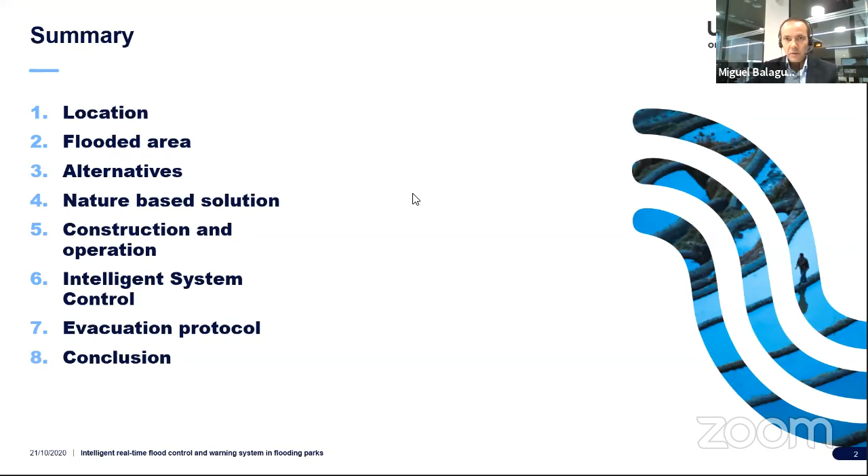I'm going to talk about this project developed in Alicante, located in the east of Spain. This area has extreme weather sometimes, so we have an area that has flood problems. So we needed to create a solution. You can see in maps how this area was flooded for many years, so we decided to take a solution.

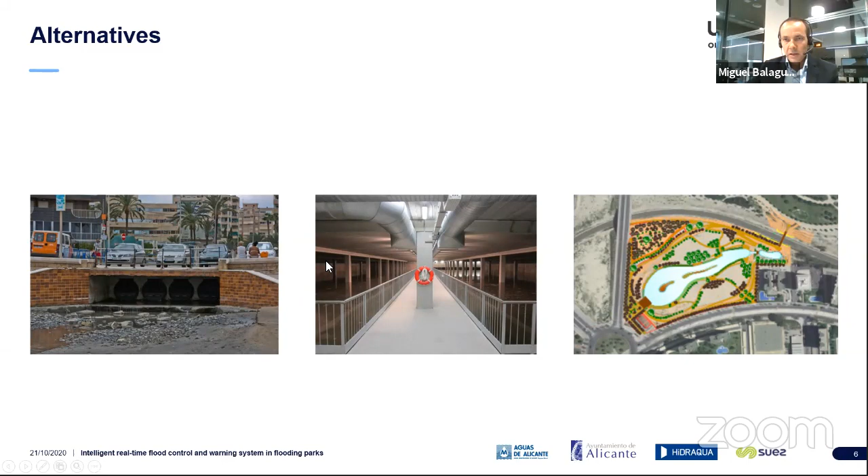These are the alternatives we took into account. The first one was a retention tank, the second was a big collector, and the third was a nature-based solution. We decided to construct the third one.

You can see now in this image, it's a new green area, created with indigenous vegetation and animals in the park. It has a social investment because citizens can enjoy it immediately as a green area.

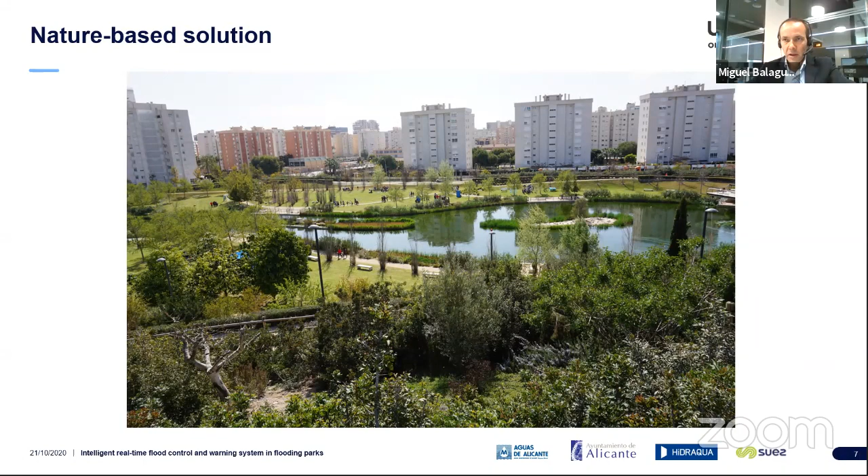As we saw before, this is how it works. It has a big collector connected to the flood park, and we have many other collectors depending on the rain. We have a pump station to the treatment plant, or we can discharge directly to the sea in case the rain was too much.

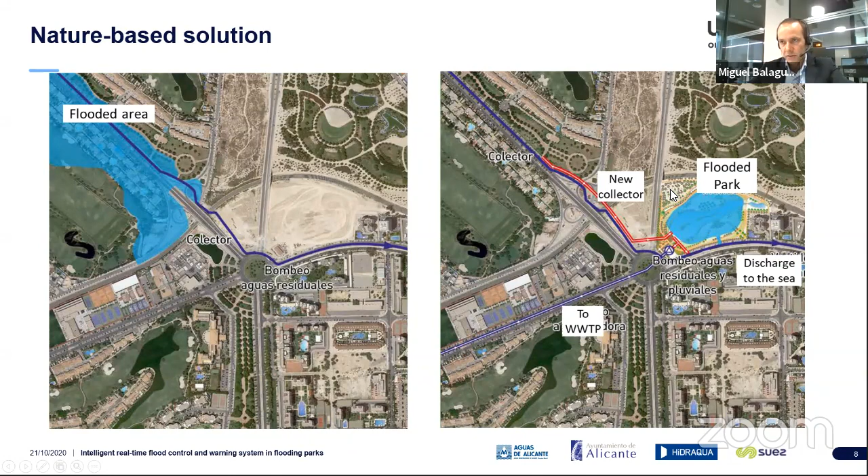In this image we can see how the construction was done. This was a field near the beach, showing different stages of construction. It was a public-private collaboration because Aguas de Alicante, who built this flood park, belongs to the municipality, the Ayuntamiento de Alicante.

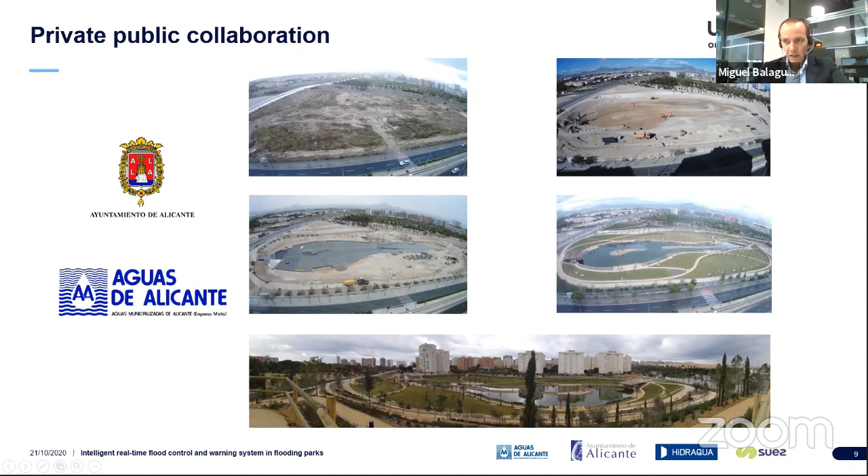How does it work? In the dry season, there is a maintenance level that we fill with recycled water. When it's raining, if the rain is too much, the water will be inside the park, the rainwater.

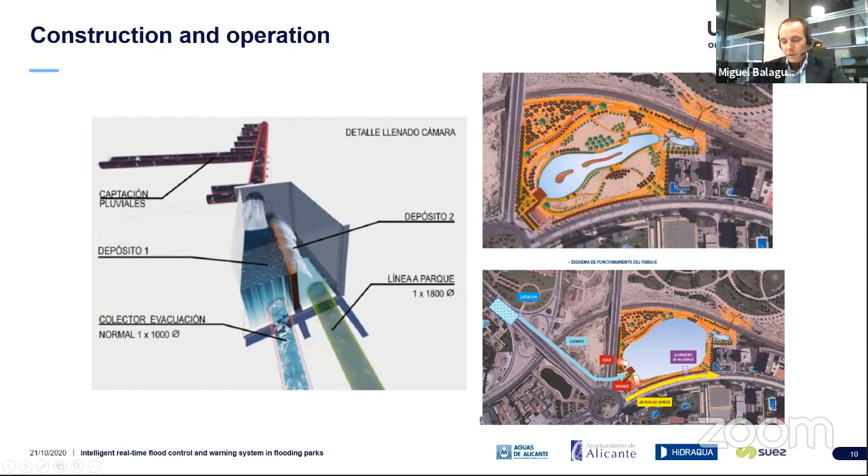Does it work? In this image we can see two cases: August 2019, when it was filling up, and March 2017. We can see the values. The worst case was 2 years ago, when it was filled up to about 49%. This flood park has 45,000 cubic meter capacity, so we only used half of it.

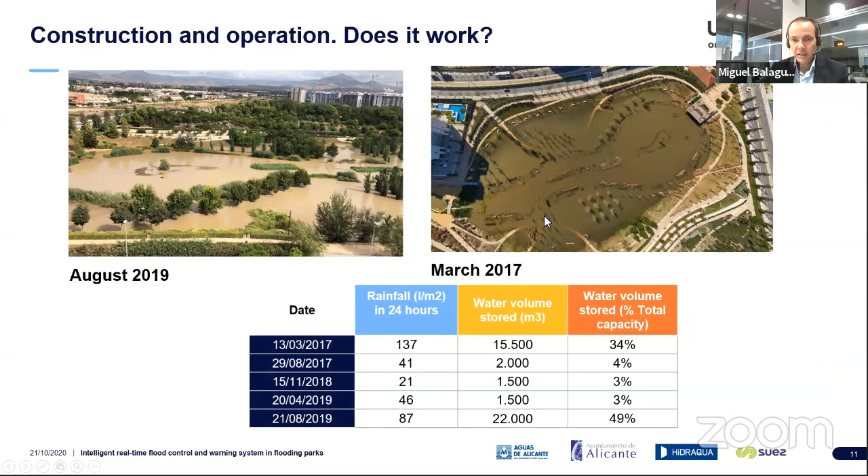The question on the topic is about the evacuation protocol. What happened with the people who were hanging out in the park? Don't worry, the people were evacuated before the park filled up. We designed an intelligent control system, an evacuation protocol.

It has these technologies: a weather forecasting system, 6 water level gauges, 4 rain gauges in the area, security cameras, an electronic display, and acoustic warnings. The system is permanently monitored and controlled 24 hours a day, all year.

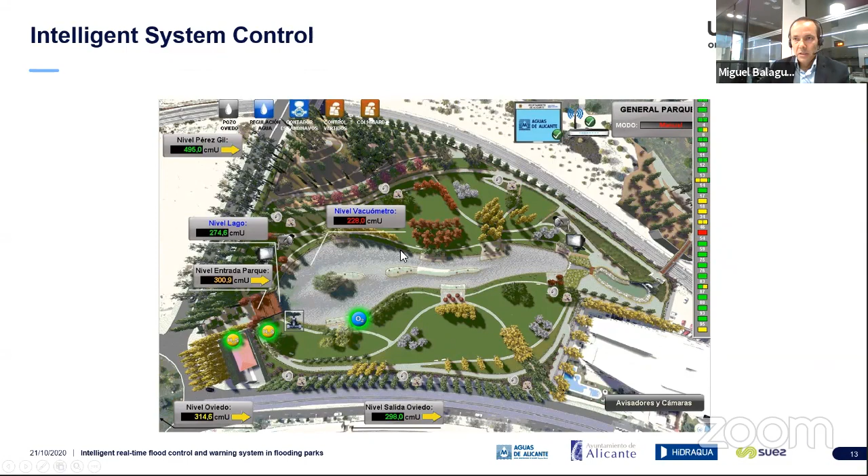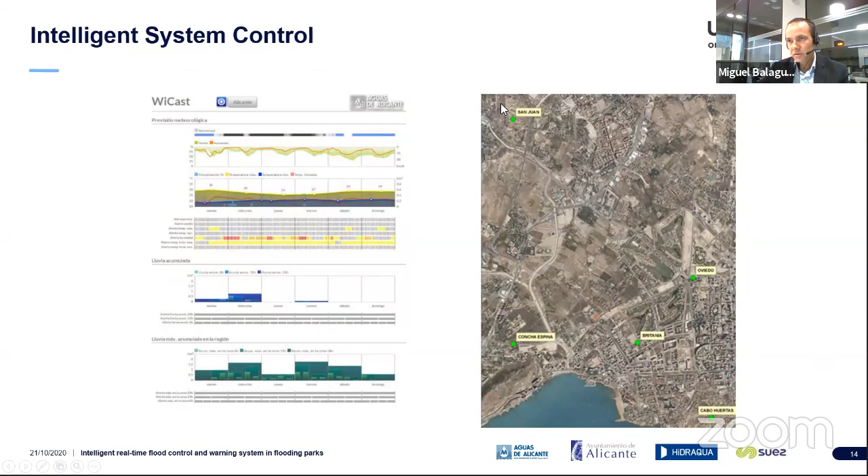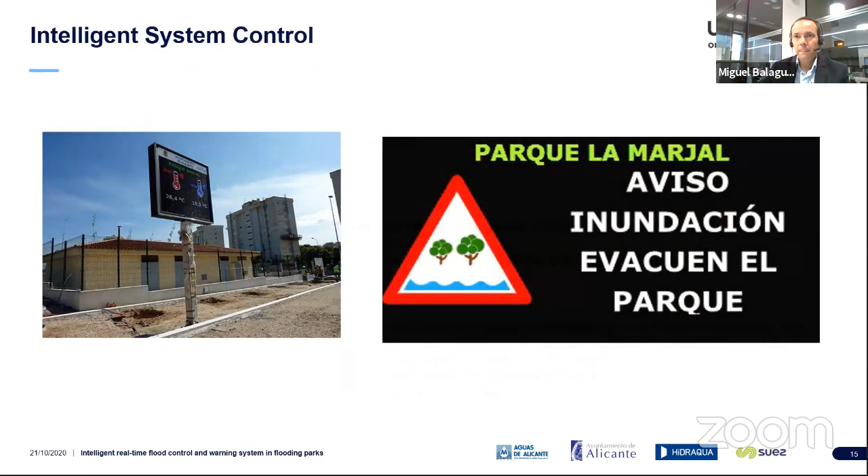This is the big display we have at the entrance of the flooding park. When we notice, we display the evacuation message or the weather status in case it's not raining. And we have defined an evacuation protocol.

When it's not raining, in the dry season, we just do weather forecasting email reporting to the municipality responsible.

When the rain is 1 millimeter per hour, we continue email reporting, but we also show a warning message on the display. The police must visit the park to be prepared in case it's necessary to evacuate, if the park is starting to fill up.

When the rain is too much, we compare the different level gauges and we know when the park is filling up. When the park is filling up, we call the emergency services, local police, municipality, etc., and we start the evacuation protocol.

There is a recorded evacuation message in different languages using the public address system and the display, and the local police will evacuate the park.

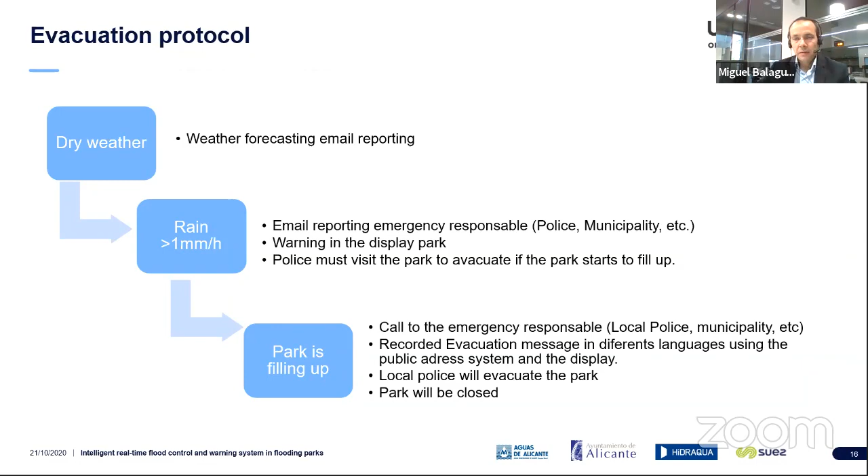The focus of this presentation was the importance of designing this kind of flooding park, always taking into account the evacuation protocol and the monitoring system. This kind of park could be a perfect nature-based solution to avoid floods and polluted discharges into the sea. A new green area is created with indigenous vegetation and animals in the park.

Citizens can enjoy it immediately as a green area. It's also a reuse park, because a large part of the excavation material from the ponds was reused, minimizing the environmental impact by reusing construction waste. The park uses reclaimed water for irrigation and filling the ponds.

But the question is that this kind of flooding park could be very dangerous, so it should be designed to fill very, very slowly, to allow enough time to evacuate people. The warning system and the evacuation protocol of the flooding park must be taken into account in the design and construction phase to avoid risk.

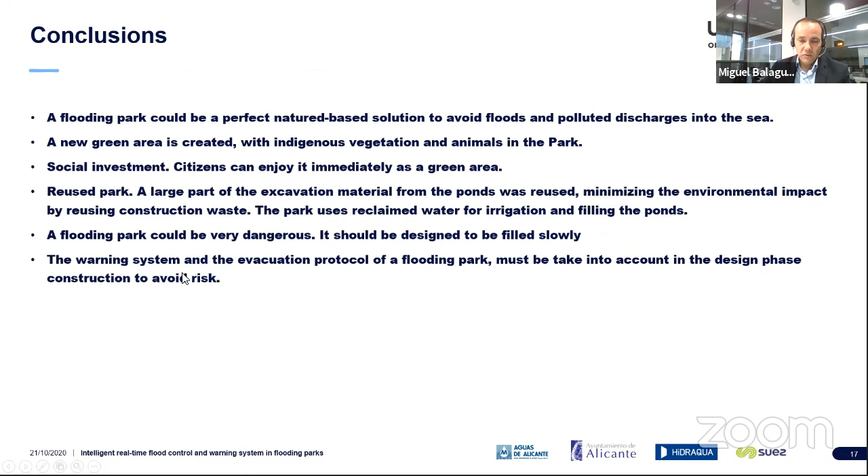So this is our presentation. Thank you very much.

Thank you, Miguel. Thank you so much. I think your presentation was a great example of a practical study, something that has even been realized. It was very interesting for me to see the project go from the master plan to the realization, and I'm sure everyone has enjoyed it.

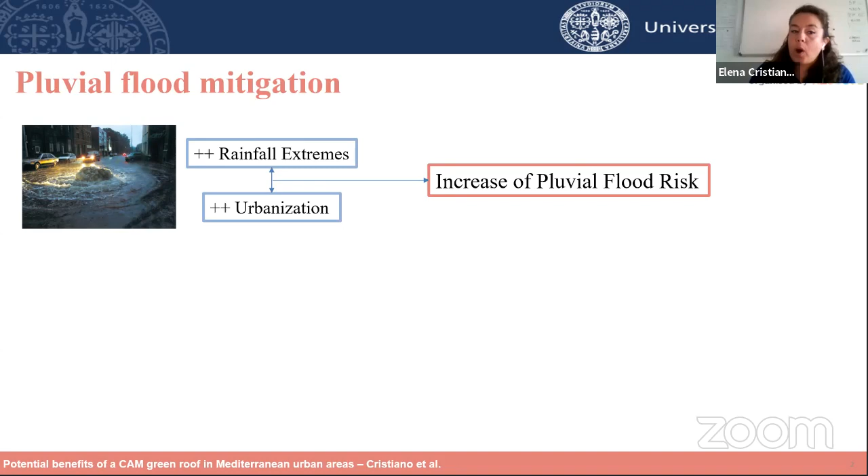In order to deal with this problem, many blue and green solutions have been developed. For example, we have permeable pavements, water plazas, harvesting systems, or green roofs. In our study, we decided to focus mainly on green roofs.

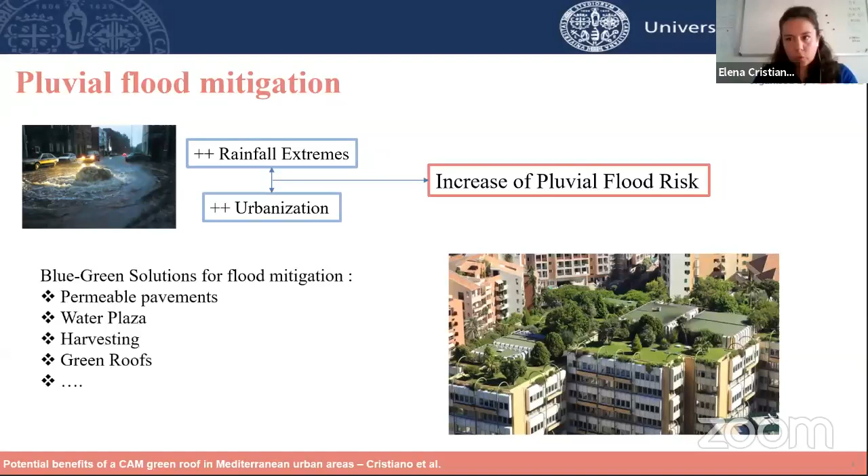Why? Because these offer multiple benefits. They can contribute to mitigating runoff generation, but also have other benefits: contributing to thermal insulation of the building, decreasing the temperature of the environment and contributing to decreasing the urban heat island, and attracting many species of insects, increasing the biodiversity of the city depending on the type of vegetation installed.

Moreover, it adds an aesthetic value to the city, which is nice, and many studies have shown that it can help human well-being, increasing concentration and improving the quality of life of people.

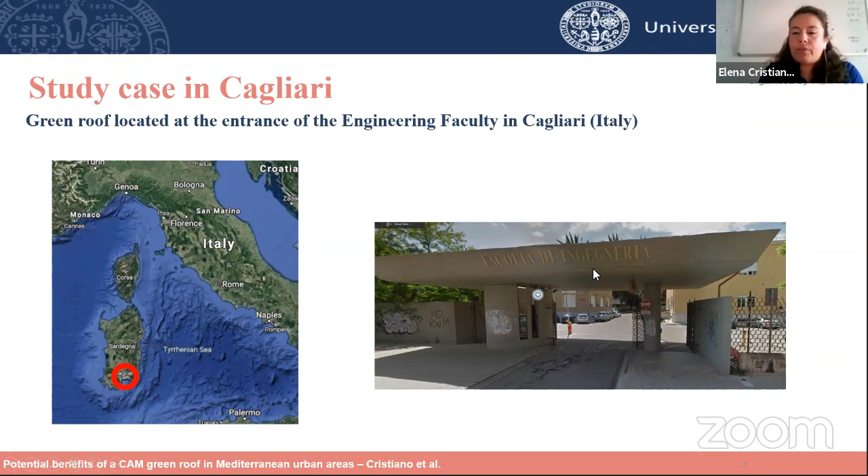Another reason why we focus mainly on green roofs is that at the University of Cagliari, we have a special green roof located at the entrance of the engineering faculty. As you can see from this picture, above the entrance we have a green roof, which is particular because it has been there since the 80s and has spontaneous vegetation. Probably in the 80s, when it was constructed, there was another type of vegetation which died because of the hot summers and the really low, actually absent, maintenance. On top of it, some natural vegetation grew.

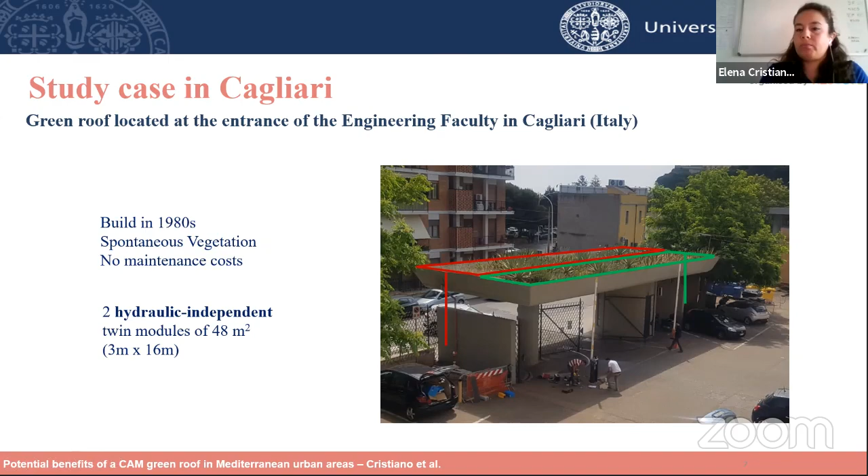What we know for sure is that no one took care of this vegetation until now, when we decided to install instruments to measure the retention capacity of this tool. As we can observe, this tool is made of two hydraulically independent modules: the red one, which drains on the left side, and the green one, which drains on the right side. We decided to measure the retention capacity of these two independent modules.

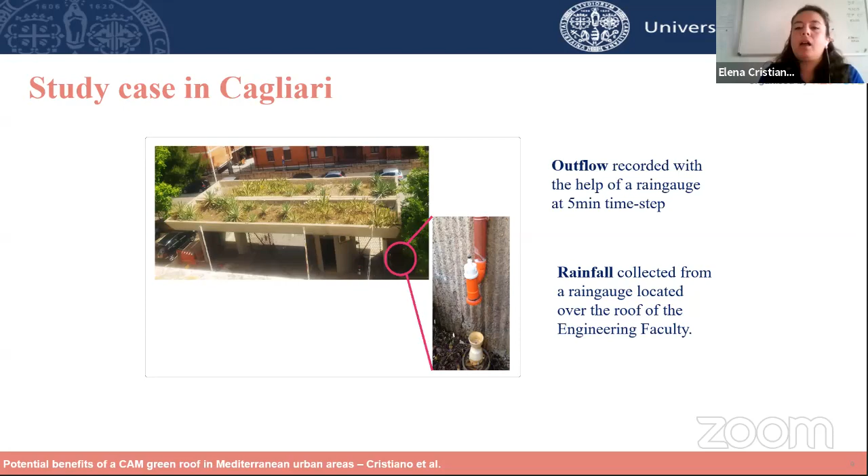So as said, the two tanks drain on the two sides, and we located some tools, some rain gauges, to measure the outflow from these tanks. Moreover, there are some rain gauges located close to the faculty, so we can have a measure of the rainfall and of the corresponding outflow from the green roof.

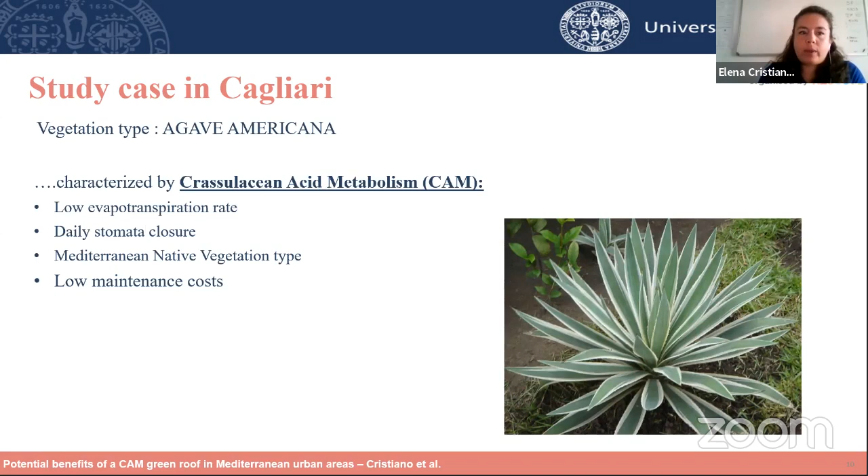About the vegetation, as I was saying, this is typical vegetation from the Mediterranean area. It's an Agave Americana, characterized by a crassulacean acid metabolism, which means this type of vegetation has a low evapotranspiration rate with a daily stomatal closure. As I said, it has no maintenance cost, doesn't require any artificial irrigation, and is capable of surviving during very extreme hot summers.

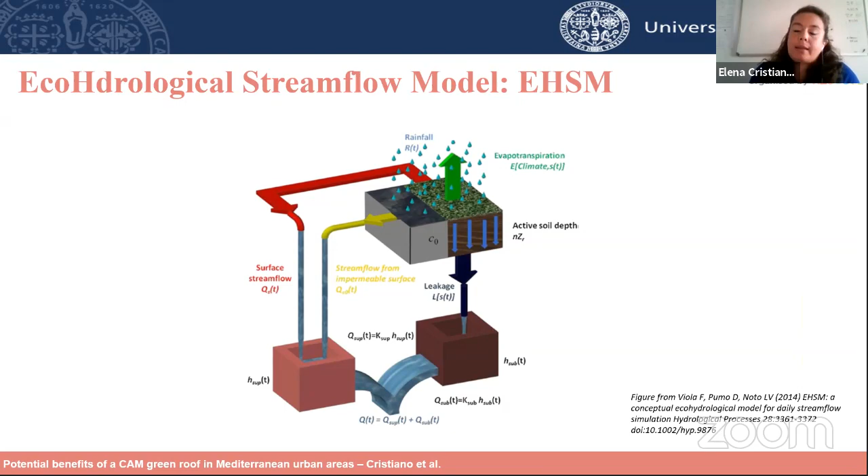We represented the hydrological behavior of the green roof with a conceptual model. Here you can see a schematic representation of the model, developed by Professor Viola, which we adapted to our study case. We calibrated the model over an observation time of one year, during 2019. What we observed was that the model was quite capable of estimating the peak of the outflow and its timing. So both in terms of timing and intensity, the model represents well the behavior of our green roof, on both the right and left side.

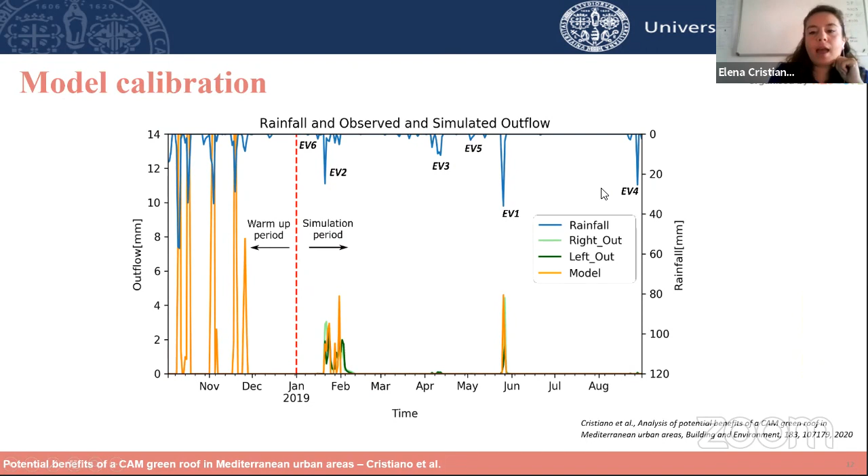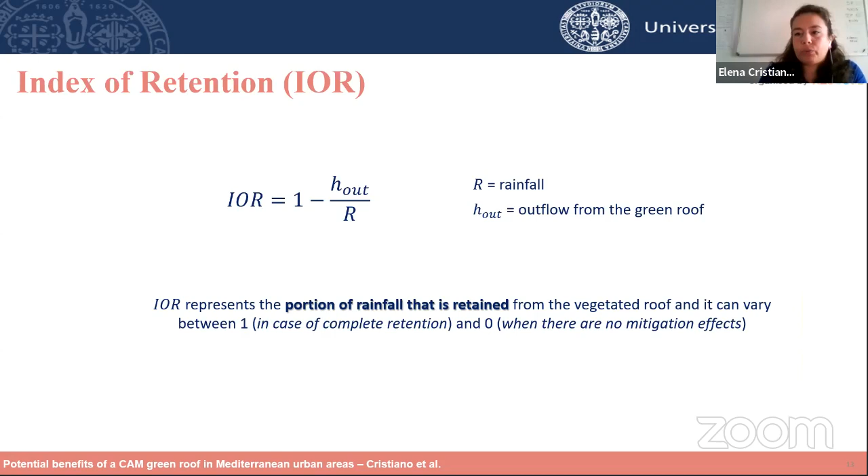We investigated the index of retention for the 6 rainfall events mentioned before, and tried to relate this index with some event characteristics. In particular, we focused on the antecedent dry period, investigating how many days before the rainfall event were dry with no rainfall, the duration of the rainfall event, and its intensity. We noticed there is an interesting relation between the index of retention and the duration of the event, as we were expecting: long rainfall events led to smaller indexes of retention.

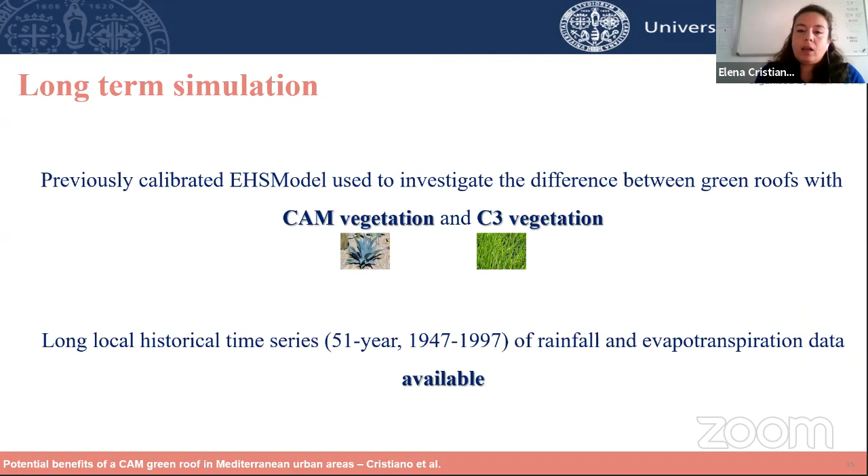Once we calibrated our model, we decided to compare a green roof with CAM vegetation to a potential, hypothetical green roof with C3 vegetation, a more common vegetation usually installed on green roofs. With the calibrated model, we represented a really long historical time series from 1947 to 1997, and compared the green roof with these two types of vegetation.

There is one note that C3 vegetation applied in Mediterranean areas requires some irrigation. So if we install a C3 vegetation on a green roof, which is generally grass or small plants, they need irrigation during summer to survive. So during our simulation, we hypothesized some irrigation for the C3 vegetation, while for the CAM vegetation, we decided not to apply any type of irrigation.

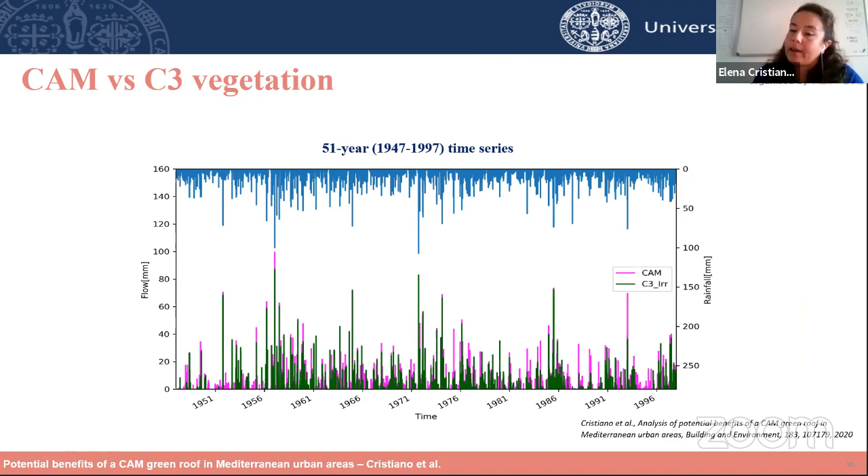This is the long time series simulation, and as you can see, the outflow from the CAM vegetation is higher, but it's actually quite similar to the C3 vegetation.

We investigated the index of retention for these two conditions, limiting it to intense rainfall events and extreme rainfall events. So we investigated all the events above the 75th quantile rainfall and all the events above the 95th quantile rainfall in order to represent these two conditions: intense rainfall events and extreme rainfall events.

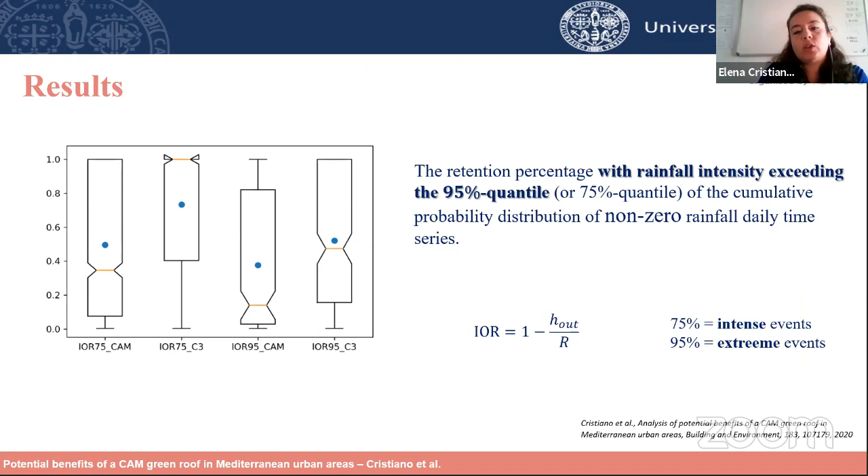What we observe is that indeed for both conditions, both green roofs perform really well. Of course, C3 vegetation is better, but only slightly better, so we wouldn't expect the CAM vegetation to perform worse.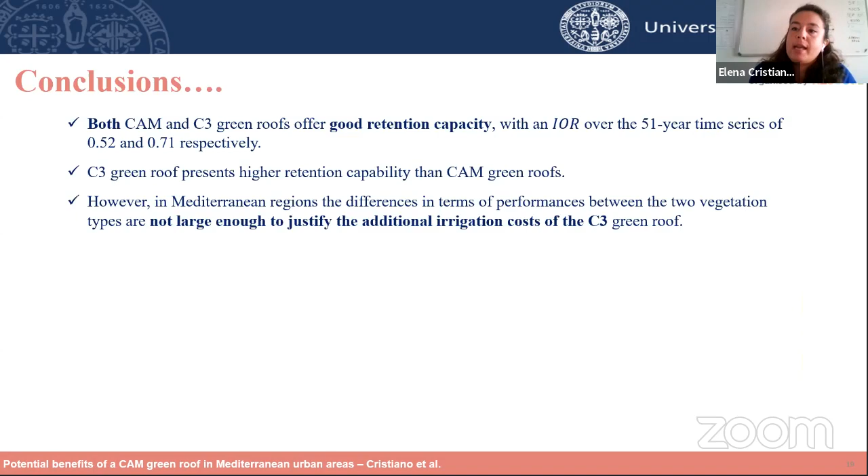To conclude, as I said, we observed that both green roofs have a good retention capacity. And what is important to notice here is that sedum vegetation, which is usually not considered for green roofs in Mediterranean areas, can perform really well. With the fact that it has no maintenance cost and doesn't need additional irrigation, it is actually to be considered for the installation of green roofs.

Of course, this is a synthetic study, so there is a need to investigate other types of vegetation. It could be interesting to investigate some multi-layer green roofs which combine the green roof structure with a rainwater harvesting system. And with that, I would like to thank you for the attention.

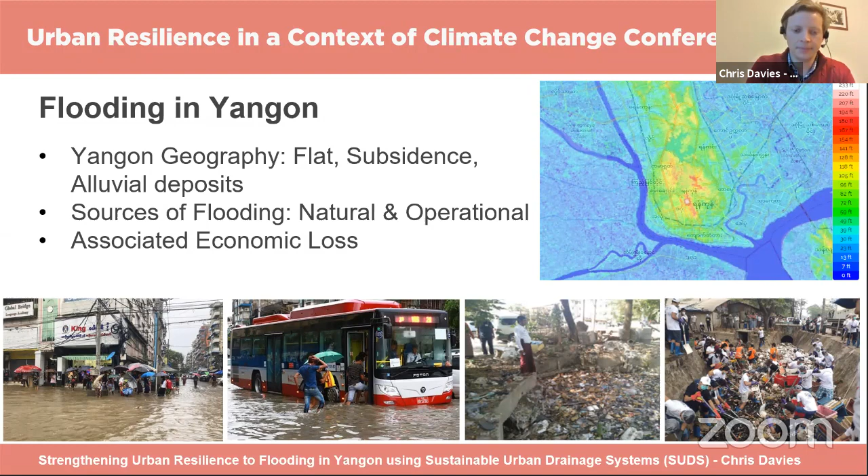As with many cities in the Southeast Asia region, Yangon has experienced rapid urbanization in the past 20 years. To bring some focus to the project, our team looked into three case study areas: formal developments, which is commercial and residential; industrial zones, typically factories and warehouses; and informal development, which is low-cost residential and informal market areas.

Within these case study areas, we talked with a range of stakeholders from public, developers and local authorities to understand perceptions of flooding hotspots and the causes of flooding.

To complement this information from the interviews, we also built hydraulic models using EPA's stormwater management model. This used data from some existing models of Yangon drainage, as well as a series of field surveys from our team.

We were able to target key flooding issues in our case study areas and present these to the authorities. So a common issue, by no means unique to Yangon,

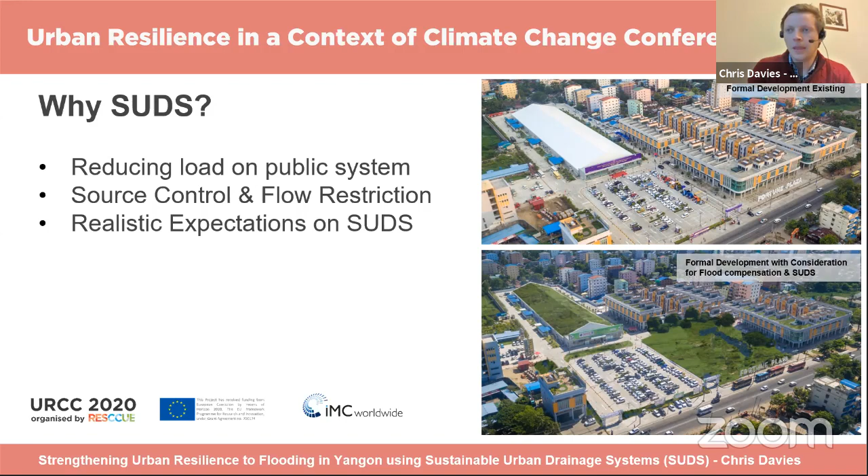We brought these findings together in a series of policy notes, including technical SUDS guidance for developers and policies on the planning process, working closely with local authorities.

These policies were then applied in case study areas to demonstrate effectiveness and understand viability. Ultimately, we're trying to create an enabling environment where landowners and developers have an incentive to adopt SUDS as a core part of the development.

We also developed flood zone maps across Yangon to help authorities target critical development. Many of you will be familiar with flood zone maps, but it was all quite new to the authorities in Yangon.

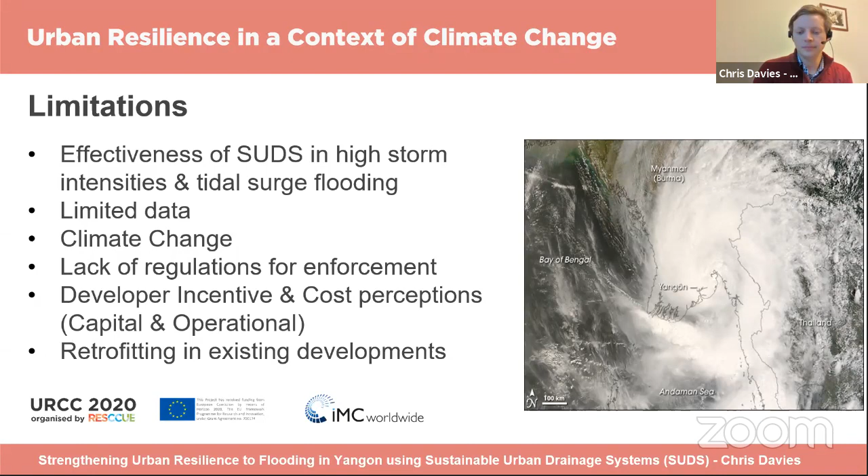So as an overview, I've talked about the range of flooding sources affecting Yangon and our case study approach, how we use this to assess specific issues and solutions. I've also touched on our policy recommendations for mapping and technical guidance, and also the planning process.

I would like to emphasize at this point that I only see SUDS as part of the solution, largely due to the high storm intensities, also susceptibility to flooding from tidal surges.

There are lots of heavy infrastructure projects under preparation in Yangon, and I'm very supportive of these.

So next steps for us are to continue to develop policies with the authorities, and also look at a new project to identify and improve key drainage assets. Thank you for your time.

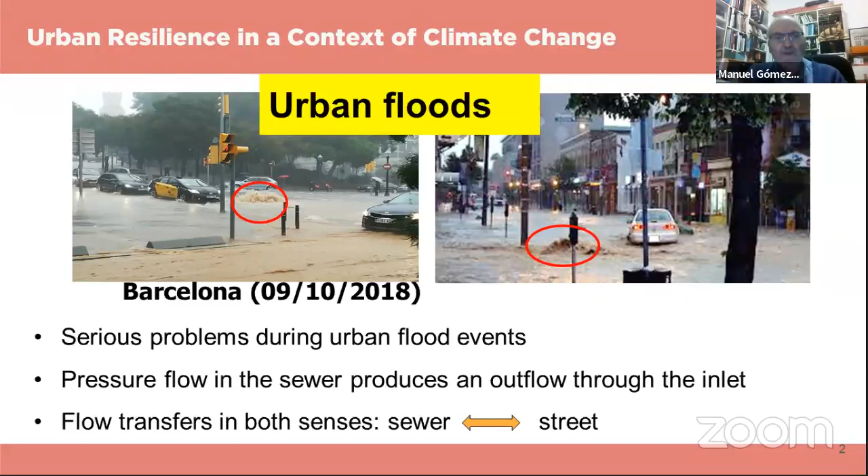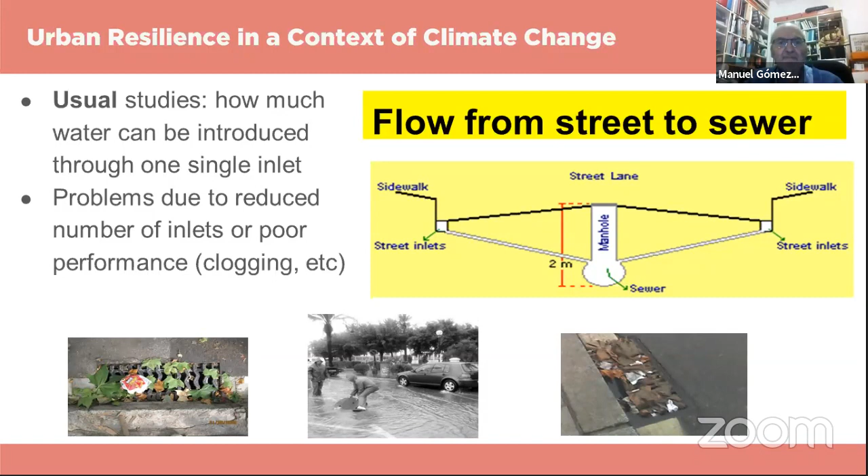What are the main problems we can have in the operation? As I said, most previous studies focused on how much water can be introduced into a single inlet. But there are several problems in some cases. For instance, we have observed local floods in our cities due to the lack of enough inlets in the district, and sometimes even poor performance due to clogging. Many times you can see in pictures that the inlet is completely covered by leaves or papers and so on.

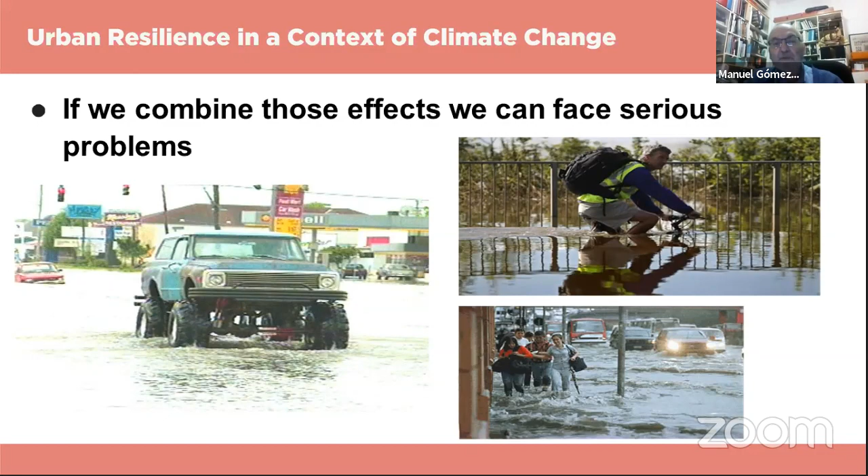If we combine all these effects, we can face serious problems for vehicles—no problem if you can acquire a monster truck like this one—problems for bikers, or even problems for pedestrians if you're not careful, like these ladies in Brazil.

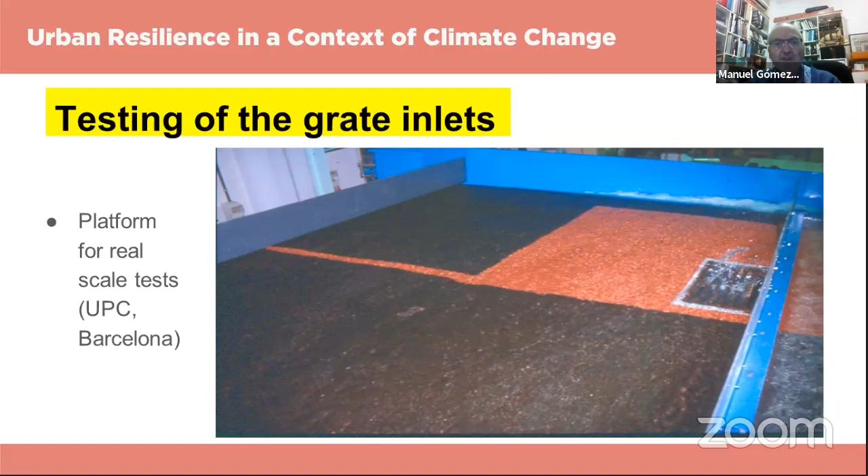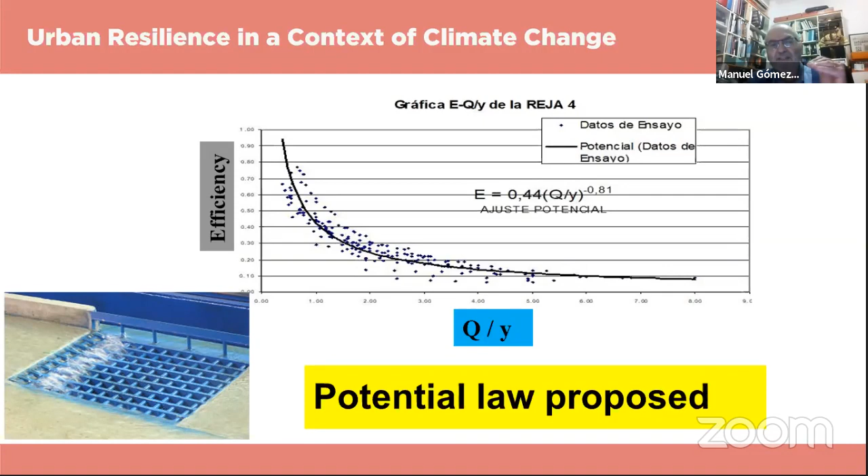The traditional studies, as I said before, were basically about the flow from the surface to the sewer. This is a picture of the platform we have in the laboratory at the Technical University of Catalonia, School of Civil Engineering, where we have tested the most usual inlets in the city of Barcelona. We have arrived at describing the efficiency of the inlet based on the characteristics of the flow along the street—this ratio between the flow and the water level, this potential law can be used to characterize the hydraulics in the sense from street to sewer.

But especially in recent years, drainage analysis in many cities has been done using this dual drainage approach—a joint analysis of what happens in the sewer and what happens with the surface flow in urban areas. Usually they use 1D modeling for the sewer system, and most of the time a 2D approach for the street flow. So the connection between these two levels is basically done through the inlets, the manholes, and so on, allowing flow transfer in both directions, street to sewer and sewer to street.

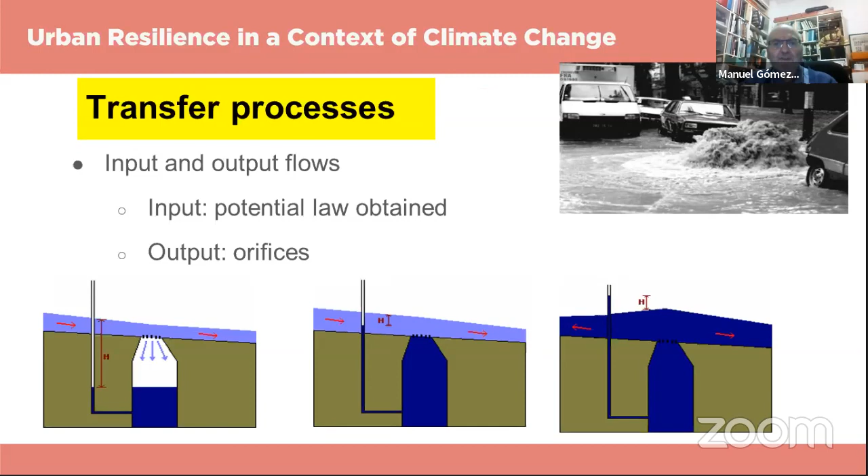The transfer process can be seen here. At the beginning, on the left, is when the sewer system is not fully pressurized, so maybe the flow goes from the street to the sewer. But as the flow in the sewer increases, we can arrive at a situation, for instance on the right, where some flow exits the sewer and reaches the surface level, increasing and producing more problems with local floods. So the specific objective of this research was to express the hydraulics of the exit flow from the sewer with a typical expression, like an orifice, and to describe the discharge coefficient for these grates in cases of pressurized flow.

Unfortunately, there are very few references of work on this, especially field tests or laboratory tests. For instance, in several commercial codes, those discharge coefficients are suggested at a typical value of 0.6.

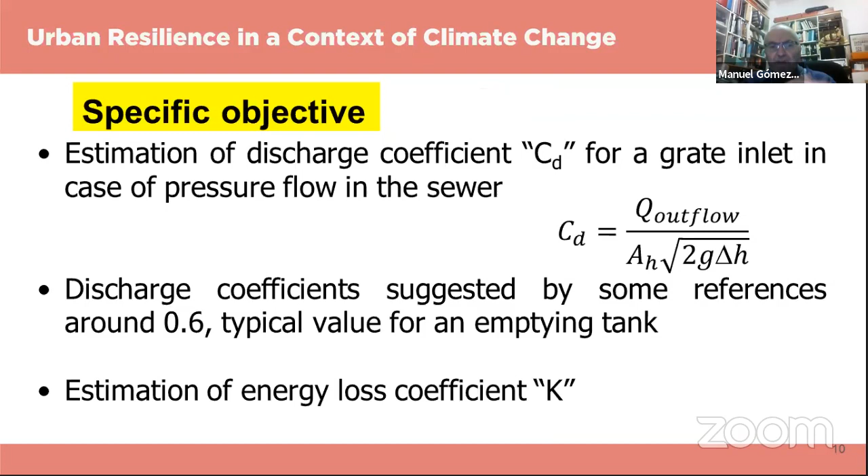This is a reference, for instance, for an emptying tank. It would be possible also to analyze the energy loss coefficient, but that's another history and not a question for this presentation. So we modified our experimental setup.

The idea is how to produce outflows from the sewer network to the surface, in this case to our platform. You see in the upper part of this picture the inlet and how the flow goes through this pipe, producing the outlet, the outflow.

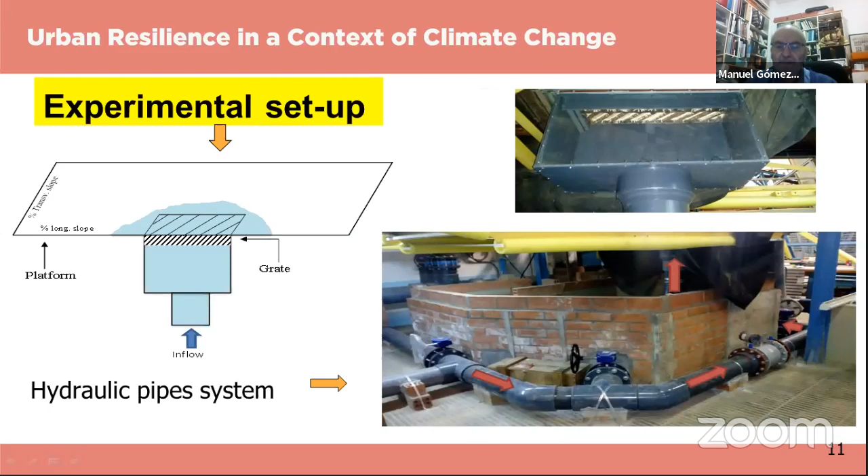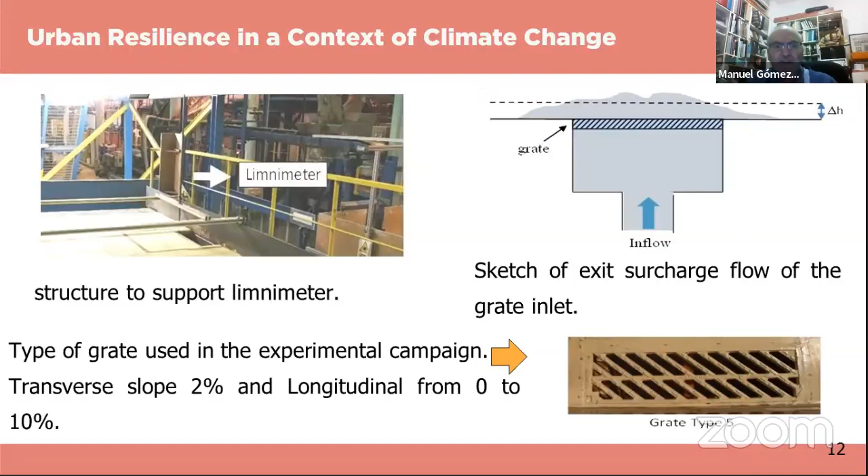Again, this is the type of grate we tested. We measured the water elevation over the grate by hand using a limnimeter. We decided to use around more than 20 measurement points.

So for the estimation of this discharge coefficient, what do we have? The outflow is imposed by ourselves in the lab. The CD is what we're looking for, the discharge coefficient, including all the characteristics of the energy losses, the shape of the grate, and so on. Then G, the gravity acceleration. The AH is the area of holes of the grate, something not provided by the manufacturer.

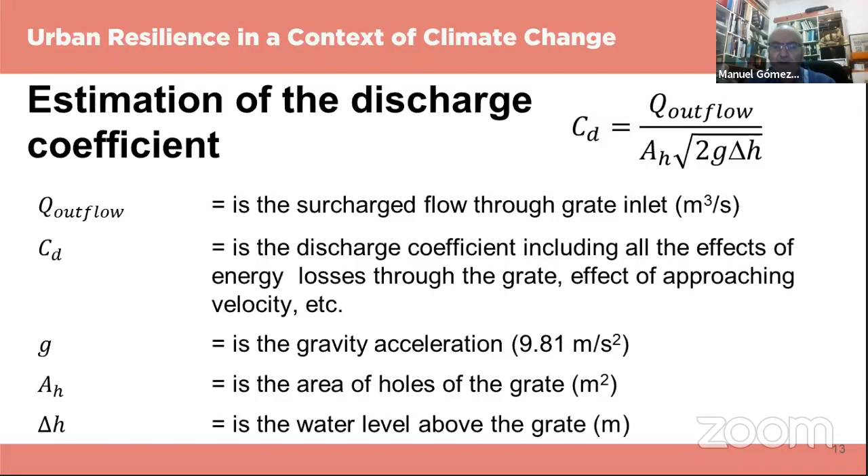This delta H could be the water level above the grate. For sure, the water level is not constant all over the grate, so that's why I decided to measure at around 20 points just to get an average.

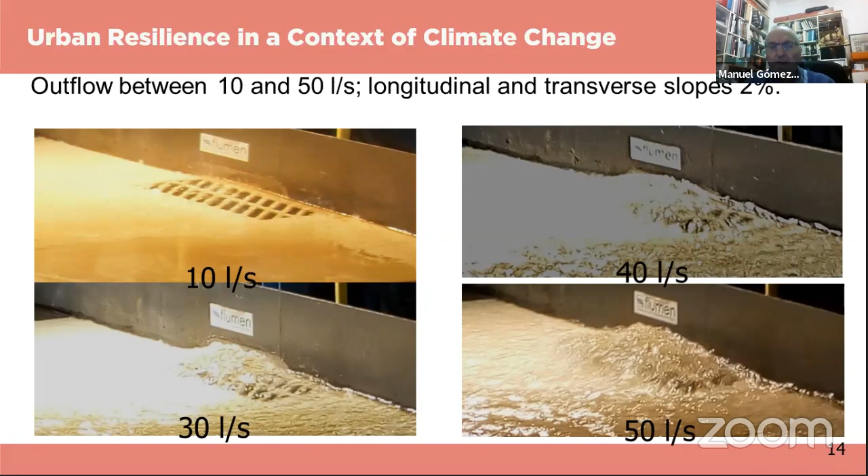During the outflow, we had to measure the water elevation over the grate at 20 different points for each test case, to consider an average value of the over-water level above the grate. We can see that it's not constant, moreover it's oscillating, so the measurement process was a nightmare, but it was finally accomplished.

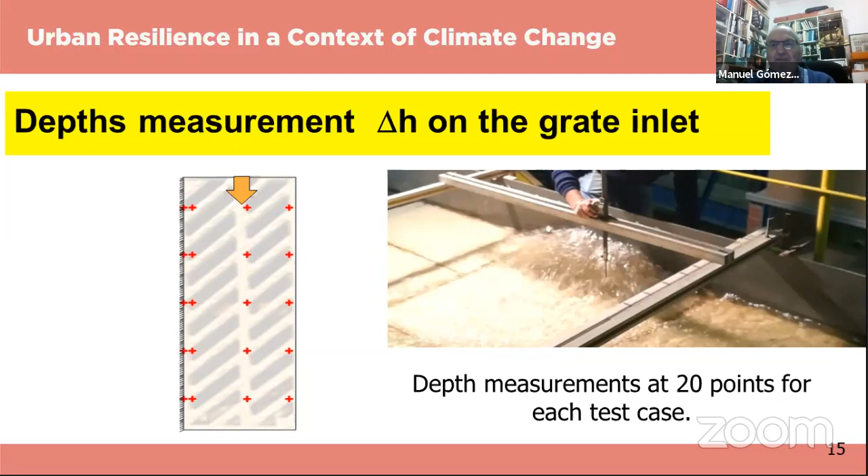So what do we get? That's interesting for the results here. What about the discharge coefficients? What we saw is that for the flow tested between 10 to 50 liters per second of outflow from the sewer, the discharge coefficient obtained varies between 0.15 and something less than 0.4. So it's not close to 0.6 suggested by most commercial codes. Moreover, what we saw is that the discharge coefficient increases with the outflow - it's not constant. The value could multiply by 2 and sometimes close to 3.

What is the influence, for instance, of the longitudinal slope? We saw that this longitudinal slope has almost no influence. We can consider that the flow value is the dominant reference for the hydraulics of this process. So slight variation, but we had no problem accepting that for different longitudinal slopes for one flow, the discharge coefficient could be completely constant with no difference.

All the tests were made with the same value of transverse slope, 2%, which is the usual value recommended in most local guidelines all over the world.

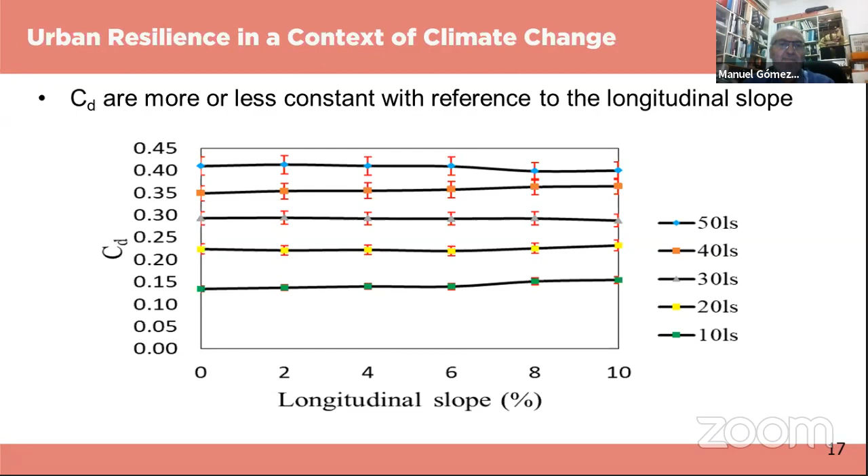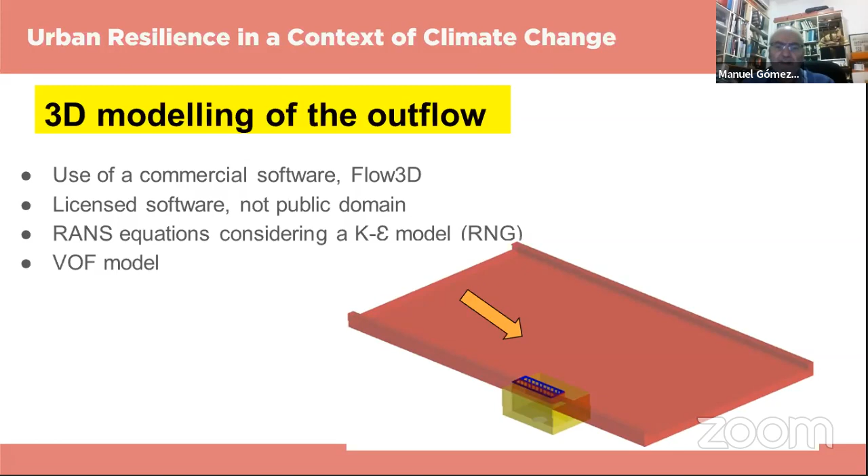In parallel with this laboratory test, we did some numerical analysis with a 3D computer code. We used a commercial software called Flow 3D - it's a licensed software, not public domain - including the Reynolds average Navier-Stokes equations with the k-epsilon model, the renormalization group, and a volume of fluid model to define the free surface in the analysis.

So we compared the water levels that we found in the lab with the water levels we got from the numerical analysis, and they were quite similar, surprisingly. I say surprisingly because when you try to compare observations in the lab or field with numerical analysis, sometimes there are distortions.

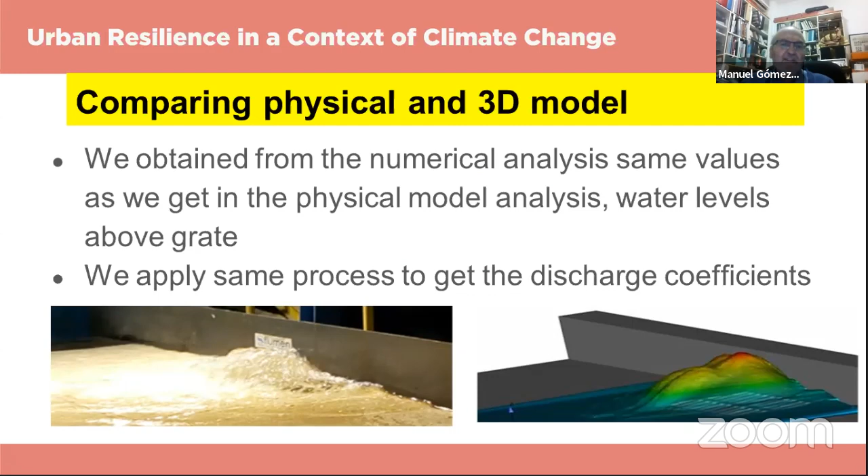But in this case, we compared the discharge coefficients found in the laboratory test and the numerical test, and the values were quite similar. The numerical procedure overestimates very slightly the discharge coefficient, but what is interesting is that in all cases, those values are below the suggested value by some codes of practice.

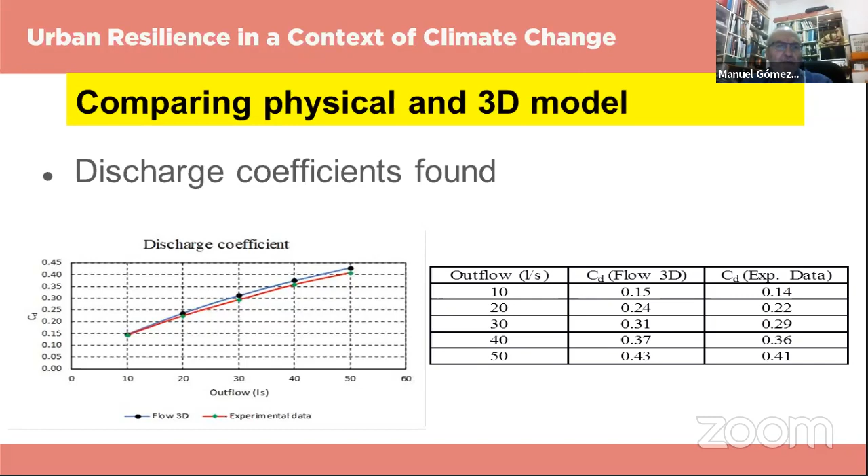To finish, the flow transfer between the streets and the sewer, in both directions, especially for the dual drainage concept, is a key element in the analysis of surface flow at the streets. The usual application of some discharge coefficient must be verified properly, because unfortunately there was little or no reference about usual values. The typical value suggested in many commercial software is far from the observed values we found in the lab, and other authors found similar values in other studies.

One side conclusion is that the process can be done better in the labs, for sure - that will be the most interesting procedure. But anyway, even with a 3D numerical computer code, results could be similar. So this could be another approach for practitioners or people who want to know the discharge coefficient of their own inlets.

So as I said, the purpose of these results is that the discharge coefficient can be used to improve the dual drainage modeling approach in urban flows, allowing us to describe much better and in a more realistic way the flow transfers between the sewer and the surface flow. In this case, it was the pressurized flows in the street.

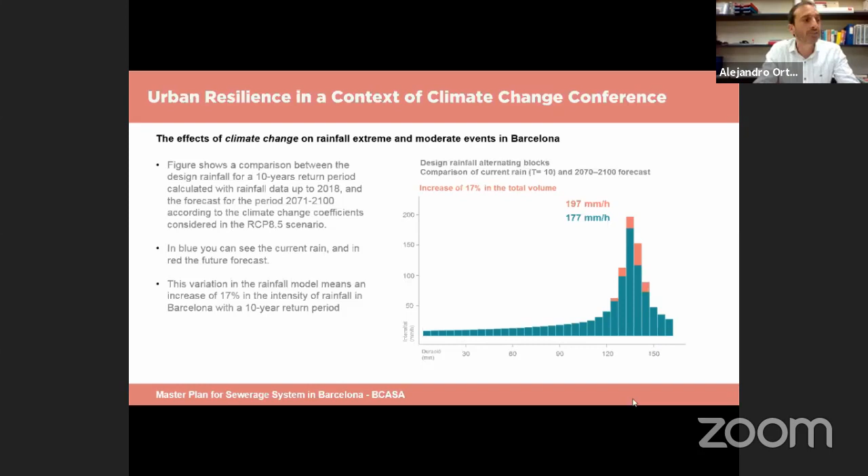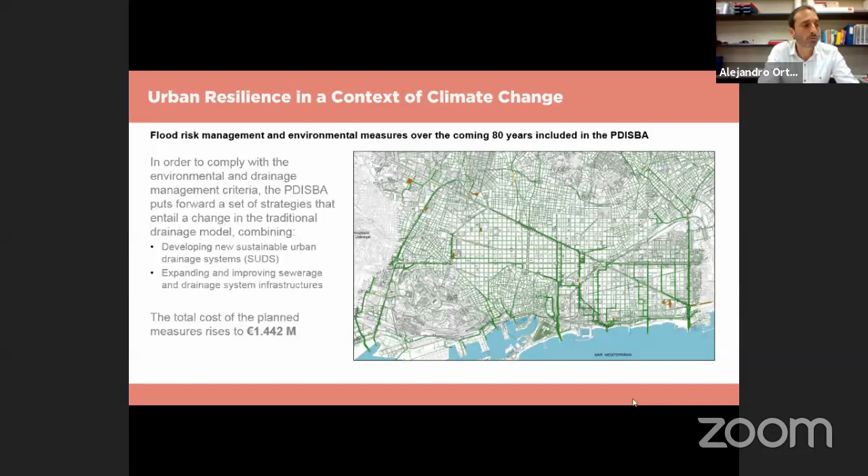The flood risk management and environment measures over the coming 80 years included in the PDISBA, in order to comply with the environmental and drainage management criteria, put forward a set of strategies that entail a change in the traditional drainage model, combining developing new sustainable urban drainage systems, called SUDS, and expanding and improving sewerage and drainage system infrastructure. The total cost of the planned measures rises to 1,400 million.

First, urban sustainable drainage system measures included in the master plan: drainage elements on the street. The PDISBA envisages Barcelona being equipped with a total surface area of 180 hectares strategically spread around the city. Second, a set of 10 retention ponds in Collserola natural area. And third, a development plan for green roofs in buildings.

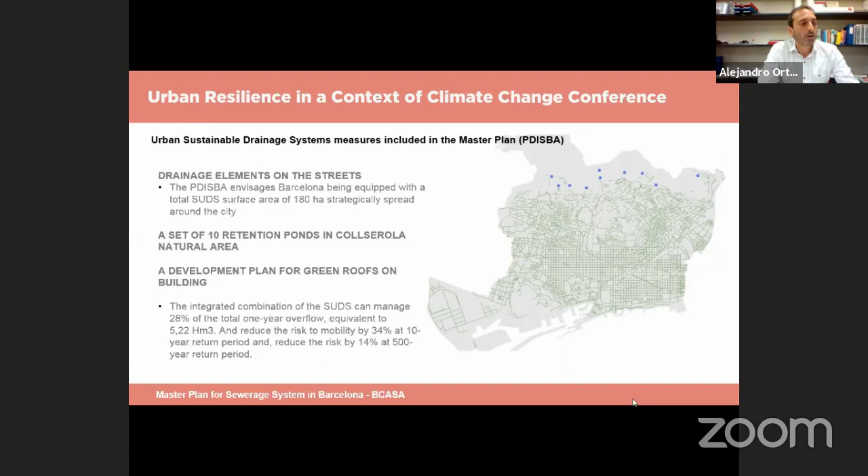The integrated combination of the SUDS can manage 28% of the total 1-year overflow, equivalent to 5 cubic hectometers, and reduce the risk to mobility by 34% at 10-year return period, and reduce the risk by 14% at 500-year return period.

Structural measures included in the master plan: anti-flooding tanks. PDISBA envisages Barcelona being equipped with 38 new units with a total volume of 1 cubic hectometer, plus existing 12 units with a total volume of half a cubic hectometer.

Anti-combined sewerage overflow tanks: PDISBA envisages Barcelona being equipped with 15 new units with a total volume of half a cubic hectometer. And primary and local network expansion.

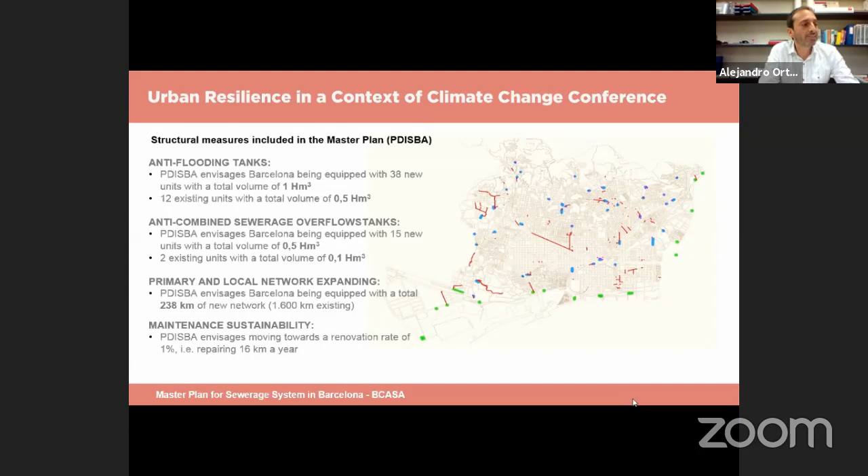PDISBA envisages Barcelona being equipped with a total of 238 kilometers of new network, alongside the existing 1,600 kilometers. And sustainable maintenance: PDISBA envisages moving towards a renovation rate of 1%, repairing 16 kilometers a year.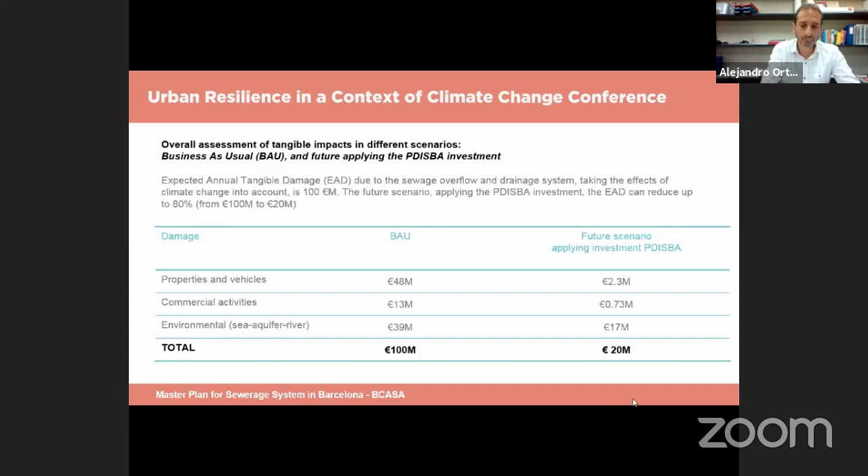In the actual scenario, business as usual, the EAD is 104 million. After applying the master plan measures, the EAD is reduced to 22 million, having a cost of 28 million, and a net benefit of 55 million in annual equivalent present value.

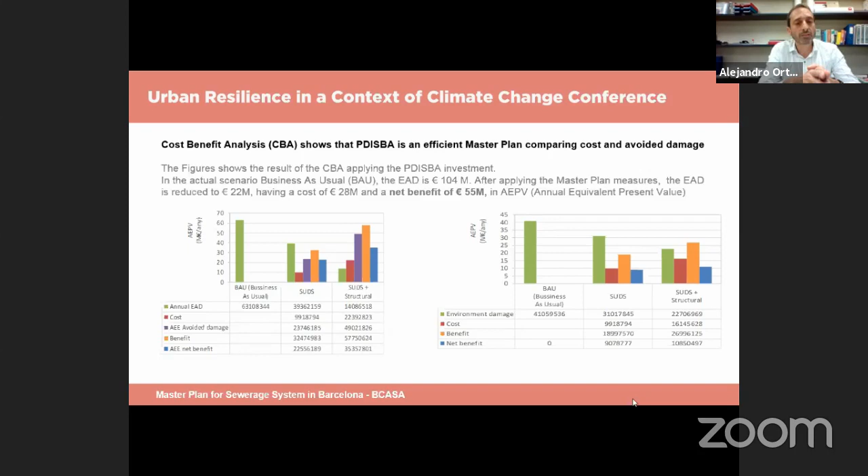Main challenges: this is the first plan to consider climate change forecasts in precipitation models. This is the first plan to include hydrological, flooding, and maritime models. This is the first plan to include measures to adapt to and mitigate climate change. And this is the first plan to involve SUDS solutions as an alternative to traditional solutions.

This is a basic tool for urban resilience and risk management. Last, this is the first plan to include economic efficiency criteria and a cost-benefit analysis. And that's all, thank you for your attention.

Thank you, Alejandro. Thank you so much for your presentation regarding the Barcelona Master Plan for Urban Drainage System. It was really interesting, especially looking at the benefits you can get by implementing such measures, up to a reduction of damage of 80%. This is really impressive.

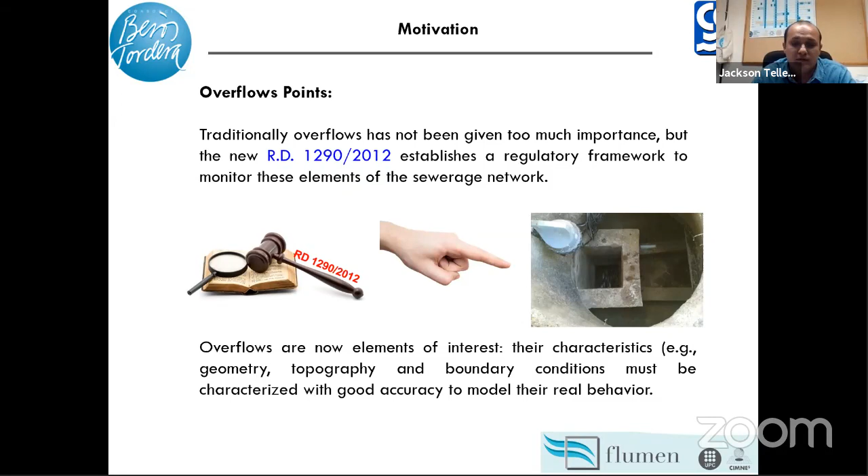In the past in Spain, the elements of interest were manholes, pipes, pumps, and treatment plants, and they didn't consider the outlet as an important element to study. After the Spanish regulation, it was established that companies and public institutions involved in urban water drainage service are compelled to monitor, detect, and quantify direct discharge into the environment.

This standard established that companies and public institutions need to monitor and quantify the discharge. Also, it's important that this standard in Spain aims to minimize the overflows in order to control the effects on people, animals, and the environment.

For this reason, in recent years, Consorci Besos Tordera has installed new sensors for monitoring the overflows and also started to do some numerical simulation in some networks within the ambit of the consortium.

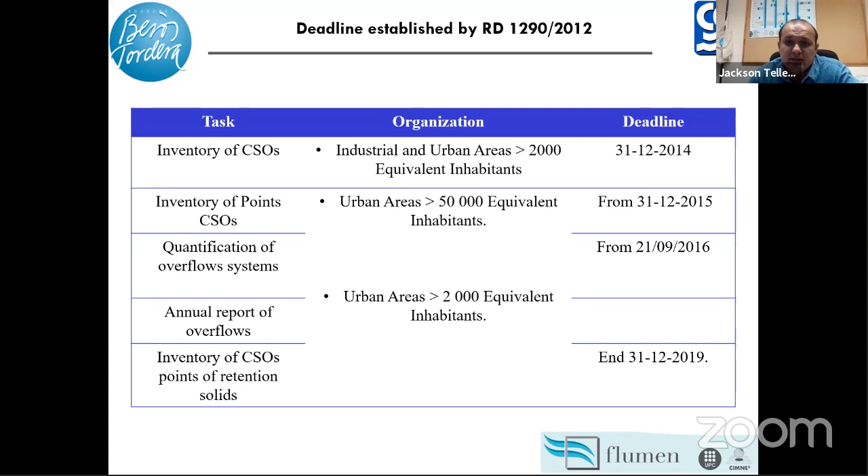After that, they need to quantify the overflow system and start doing the annual report of overflows from 2016. And at the end of last year, 2019, they needed to give the inventory of overflow points of retention solids. This is the schedule, but it's also important that this standard established that discharge flows and water quality must be quantified.

Now we know the Spanish regulation. Now in the consortium, we need to accomplish the Royal Decree 1290 of 2012, and we need to report to the Agència Catalana de l'Aigua. In order to accomplish this regulation, the consortium installed a lot of instruments in some overflow and outlet points for the control of discharge during periods of rain.

In doing this, we found some difficult things at this stage, because sometimes the outlets have different topography and different geometry, making it difficult to install sensors. Also, it's impossible to install sensors in all the outlet points because we have a very big basin. We also need a lot of human resources in order to install sensors and to maintain them.

For this reason, the consortium developed a project in order to find a methodology to perform sensor placement, choosing the optimum set of outlets to monitor. This will be an advantage for choosing the outlet points to install sensors.

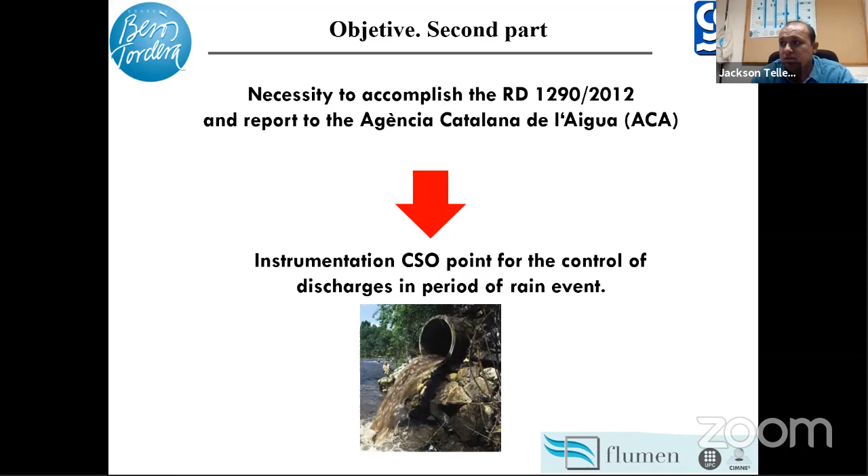With this study, we can say that we can take the best location for sensor placement across these 3 different systems: Granollers, la Llagosta, and Montornès. We evaluate the new location or point of outlet necessary to install sensors.

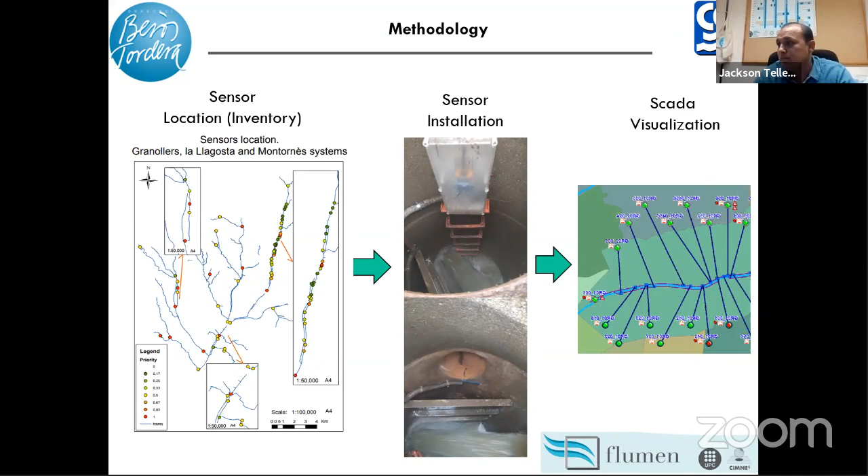In conclusion, identifying the best location for sensor placement is an advantage for us because we have a lot of outlets and it's impossible to install sensors on each one. This allows selection of the best outlet set to monitor the wastewater network.

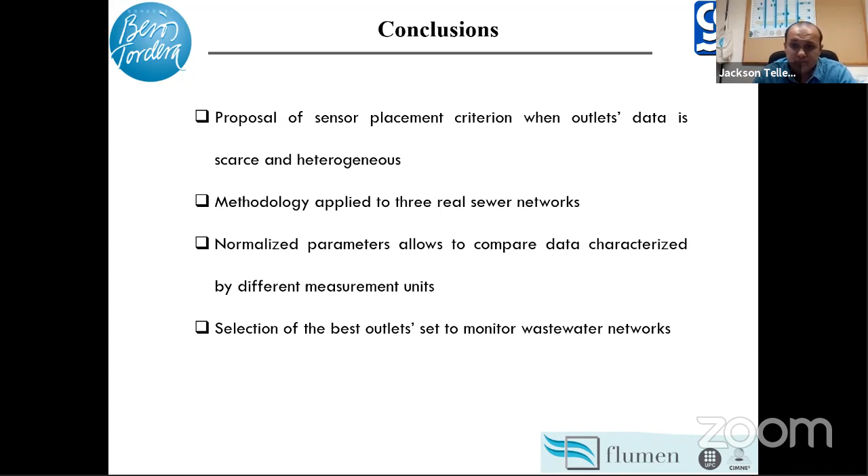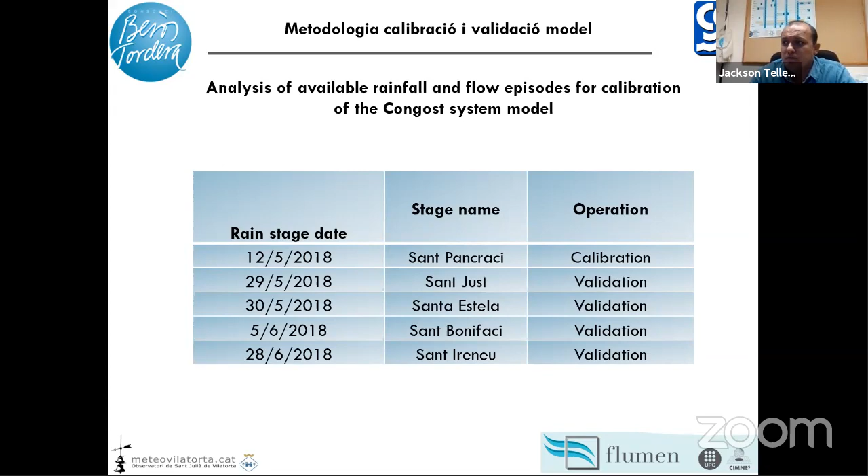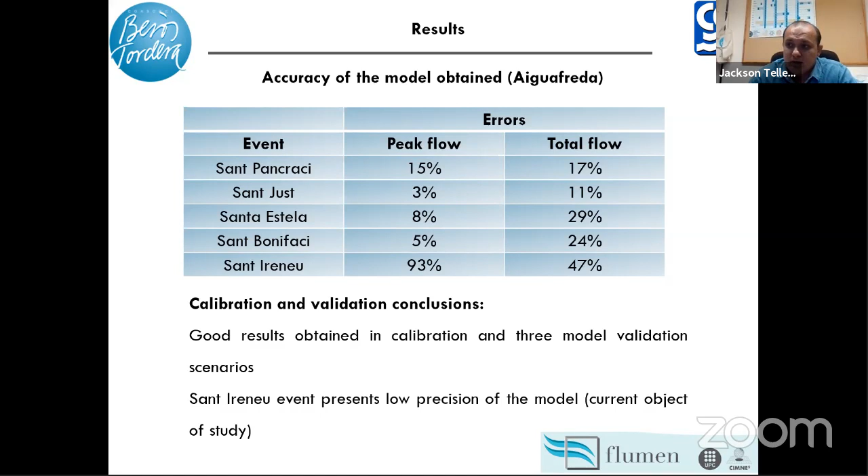and we can see better result of the simulation. After that, this is accuracy of the model of Aiguafreda, Sant Pancraci for calibration. We have the peak flow and the total flow. Only we can see that we have a good result of simulation. We can say only Sant Ireneu event present low precision of the model.

And it's important to note that for calibration, we need the measured rainfall and flow rate required to perform the model calibration. We can see that we have a good calibration of the model, and we need to have more results in order to validate better the model.

Thank you for the attention.

That's it. Thank you, Jackson. It was great to end the presentation with yours, which is another applied case study, and it was really interesting to see your input into that. I think now we have time to open the floor to questions, and I have already questions coming up, and I think we can start from the beginning.

So the first question would be for Miguel. This question is from Eduardo Martinez Gomariz, and he's asking about what's the residents' perception of this impressive infrastructure? Because he guesses that during the project stage, there was more citizens' complaints than nowadays, but now they can see how effective this is. So he's wondering about the perception of the residents before the realization of the structure.